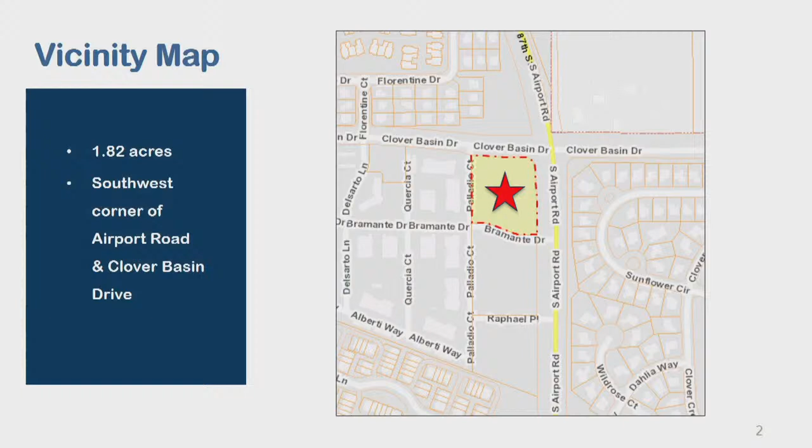So with that, this 1.8 acre site is located at the southwest corner of Airport Road and Clover Basin Drive in the Renaissance area.

The subject property is one of three adjacent properties, parcels fronting Airport Road, that are zoned MUN. The Vera West apartments are located immediately to the west on a parcel zoned residential multifamily. To the north of Clover Basin is a mix of attached and detached single-family units zoned RMN. On the east side of Airport Road is a single-family subdivision zoned residential single-family. To the northeast of this property is largely an unincorporated Boulder County enclave. There is a little sliver here of public facilities - it is a utility facility owned by Northern Water.

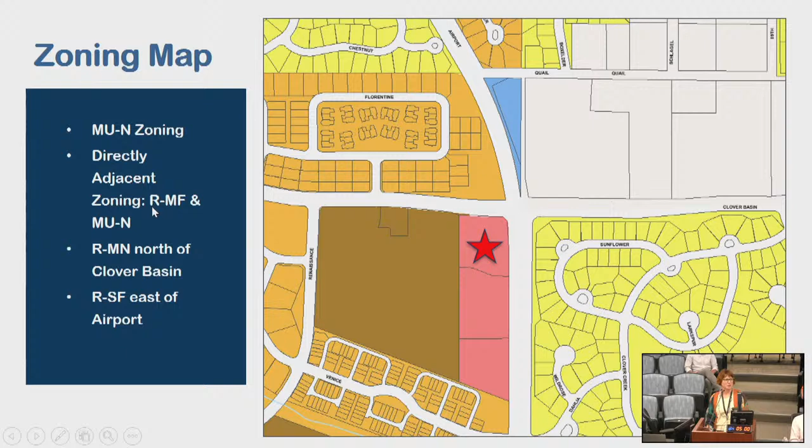I'll also note that Clover Basin Drive in this area is a median separated roadway, so basically you've got one way - you can go right in, right out onto Clover Basin Drive.

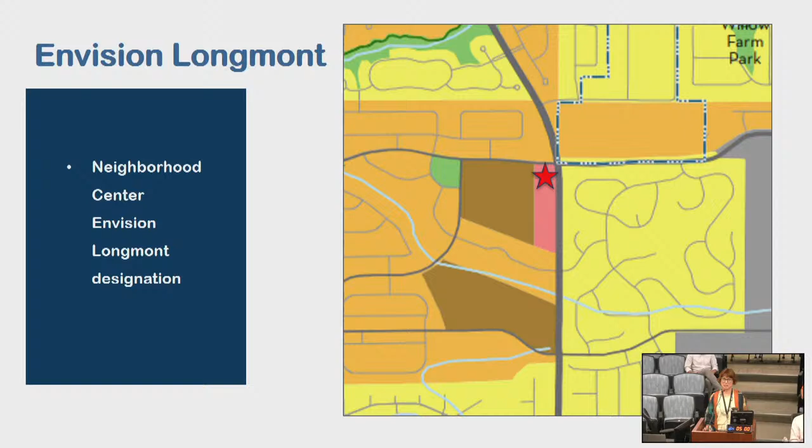So on Envision Longmont, this property is designated as neighborhood center. Neighborhood centers are intended to offer a mix of supporting services and small-scale commercial retail uses for surrounding residential neighborhoods. As detailed in the staff report, the proposed use is consistent with the provisions of Envision Longmont.

So in terms of general project information, the applicant will give a more detailed description of what they are proposing, but I'm going to give an overview. They are proposing a Ziggy's Coffee Cafe with drive-through service. It is a proposed 1,800 square foot single-story building that would include interior seating as well as outdoor patio seating in addition to the drive-through.

Restaurants with drive-through service do require approval as a conditional secondary use in the MUN district.

Access to the property would be from Palladio Court and Bramante Drive, both of which are private drives within the Renaissance community. There are shared access points onto both Clover Basin and Airport Road, which are limited to right-in, right-out movements. So this property does have some pretty interesting constraints, notably on the eastern portion of the property.

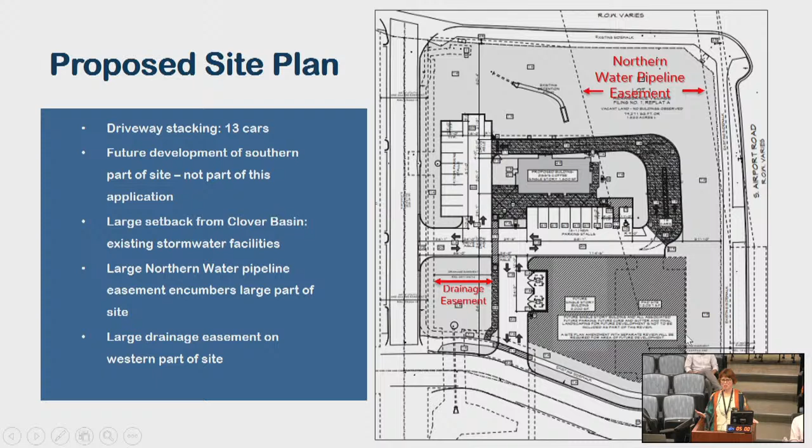Approximately the eastern third-ish contains an 80-foot wide pipeline easement held by Northern Water, as well as a significant drainage easement on the western portion of the property. A large setback from Clover Basin Drive is needed to accommodate existing stormwater facilities for this area. I will note that the southern portion of the site is contemplated for future development, but is not part of this application. If these southern parcels that are indicated for possible future development do come in for proposed development, if this site plan were approved, they would need to come in and do a site plan amendment to accommodate those properties.

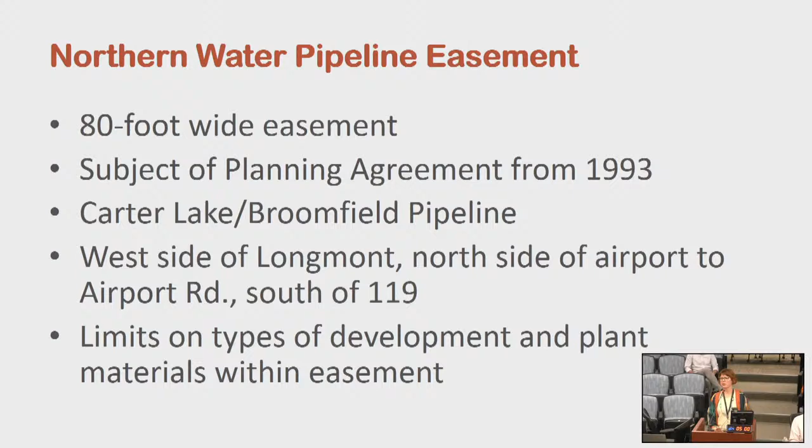As noted previously, there is that 80-foot wide easement held by Northern Water on this property. The planning agreement between Northern Water and the City of Longmont includes limits on the types of development and plant materials within this easement. The applicant and staff have coordinated with Northern Water representatives throughout this process to ensure that their requirements are being met in terms of plant material and what is allowed within that easement.

In terms of secondary uses, this site is part of an MUN district consisting of 3 parcels. There are 2 undeveloped parcels in this district, and the center parcel has been developed and contains a neighborhood scale commercial building that is occupied by primary uses in the MUN district, notably a tap room, ale house, a veterinary clinic, and a liquor store. Development of this property with a proposed conditional secondary use would still leave ample space for primary uses within this MUN strip.

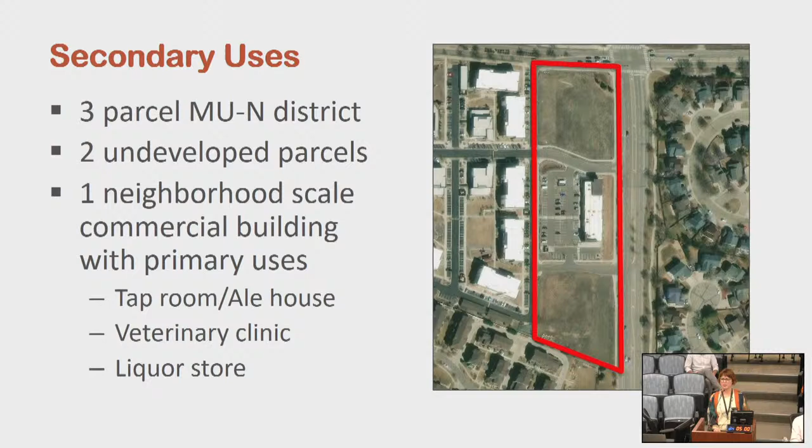So in terms of the development review process, it's been in process, including pre-application requirements, since 2022. There was just a bit of time lag between some of the submittals, so that accounts for the length of time of this project.

So at this point, I'd like to discuss the review criteria for all types of development, as well as conditional and secondary uses. Staff does find that the proposed Ziggy's Coffee with drive-through service does meet the required review criteria, meeting the standards established for conditional and secondary uses in the Longmont Land Development Code and residential compatibility requirements and standards for drive-through service.

Potential adverse impacts have been mitigated to the maximum practical extent. This site does include more than adequate stacking for the drive-through lanes, which are also sited and buffered in a manner that will minimize their visual impact, and also provides adequate customer and employee parking. EV and EV-ready spaces are provided as required in the Longmont Development Code and Colorado statutes.

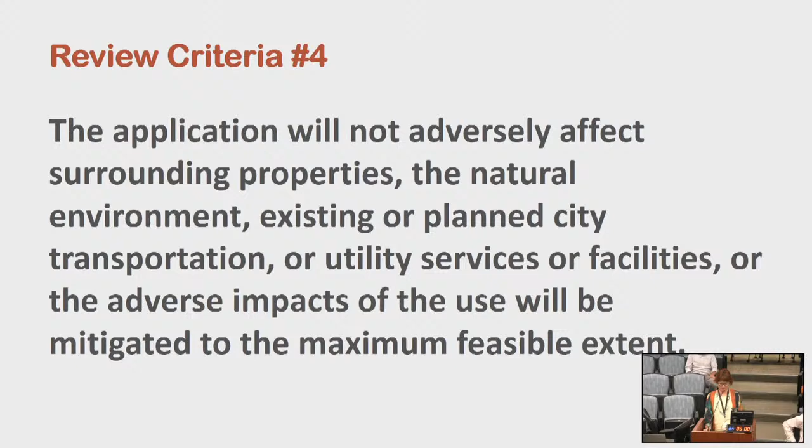Lost my spot here. So basically, all the transportation and utility infrastructure are in place to serve this project, as it is part of, it would be infill in a largely built-out area.

So the subject property is not within a riparian area, so this particular criterion, review criterion number 5, does not apply here.

The proposed site plan does include a pedestrian path to an existing sidewalk on Bramante Drive that does provide a connection to Airport Road and would also provide additional connectivity throughout the Renaissance neighborhood. Additionally, bicycle racks, ADA accessible spaces, EV facilities are provided in accordance with our code.

So in terms of conditional uses, these are uses on which specific conditions may be imposed to ensure compatibility and mitigate any potential adverse impacts. In the present case, the site has been designed in a manner that minimizes impacts and ensures compatibility with existing nearby residential areas.

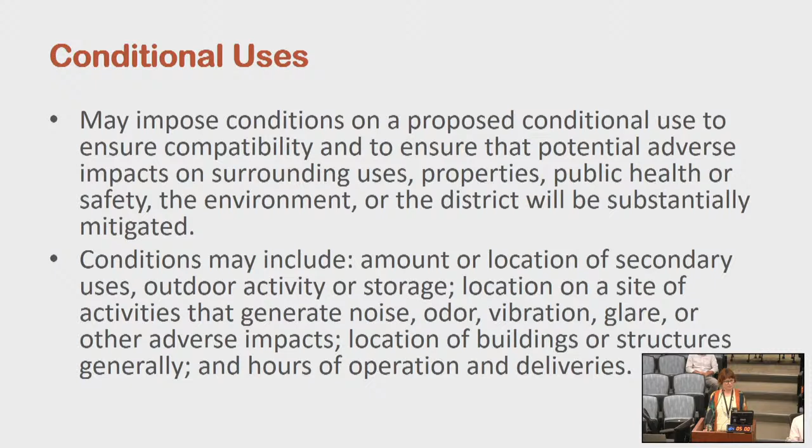So in terms of secondary uses, they must meet 3 additional criteria. The subject property is intended for development with neighborhood scale commercial uses. No direct access, again, will be provided to either roadway. There is adequate capacity on roadways to accommodate additional traffic, though as noted in the traffic study and mentioned in the staff report, this type of use typically captures existing traffic rather than generating new trips.

So it doesn't necessarily become its own destination. It's the type of use where people stop in on their way somewhere else while they're already on the road, if they're driving.

So the proposed drive-through, as mentioned, does exceed code requirements. And additionally, this proposed building will include indoor and outdoor patio seating. The site includes pedestrian connectivity, bicycle parking. The nearest adjacent residential use is a 3-story multifamily development immediately to the west.

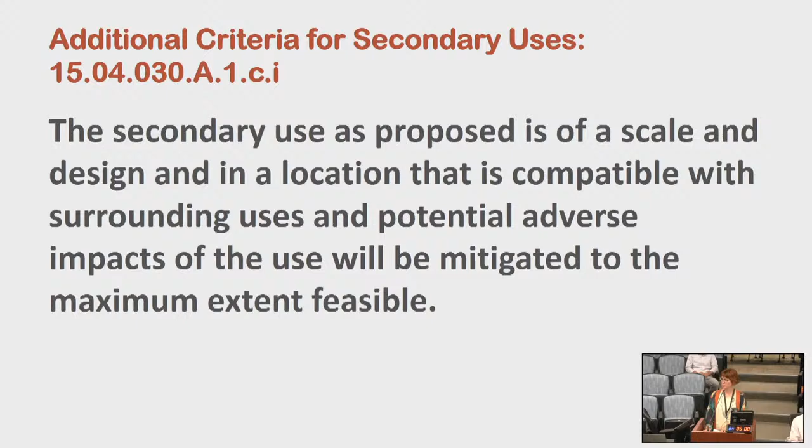So with all of these elements, we do find that the proposed secondary use is compatible with surrounding uses and potential adverse impacts would be mitigated.

As described previously, the proposed Ziggi's Coffee is consistent with the goals and policies of Envision Longmont and is consistent with the neighborhood center land use category. The proposed use is also consistent with the purpose and intent of the MUN zoning district as well as development standards contained within the LDC.

Additionally, it does, as mentioned previously, exceed requirements for proposed drive-through service as far as stacking, which will minimize those impacts as well.

Finally, the MUN district in which this subject property is located contains a bit more than 5.5 acres. The parcel immediately south is developed with a neighborhood shopping center, but it only contains primary uses. The southernmost property in this district is undeveloped.

So development of the subject 1.8-ish acre property with a secondary use would result in less than one-third of this district being occupied by secondary uses, and would not cause the district to exceed the 50% threshold we have interpreted historically as the ceiling for secondary uses in a zoning district. It would not diminish the available supply of land available for primary uses either.

One other thing to note is that the proposed Ziggi's Coffee would not occupy the entire site, and it is likely that the southern portion of the site will be developed for additional uses at some point in the future. Those could very well be primary uses, so it's very likely that this property does not entirely contain secondary uses either.

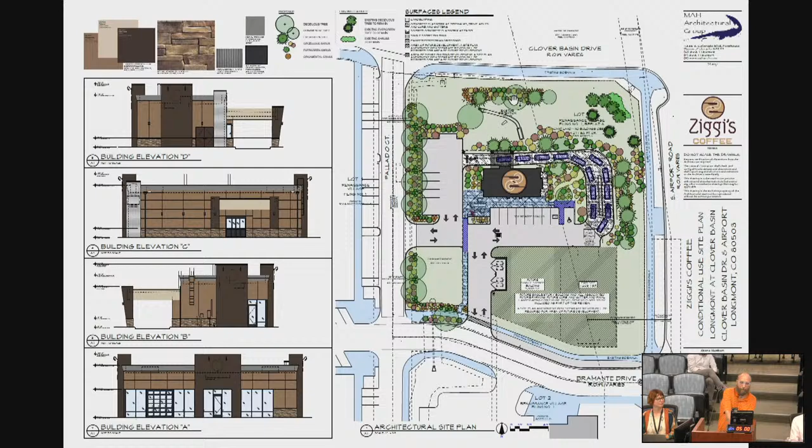Thank you. This is a public hearing item. As such, we will go ahead and open this up for public invited to be heard to comment on this. We do have one person who has signed up: Javon Beck.

I apologize, I'm not able to really speak to that one. Okay, I appreciate your honesty. Thank you.

You can sit down for a second. I just need to collect my thought first. Are there any other comments? Because I had another thought, but I just wanted to collect it for a second. Is there no one else? Anna, did you have something?

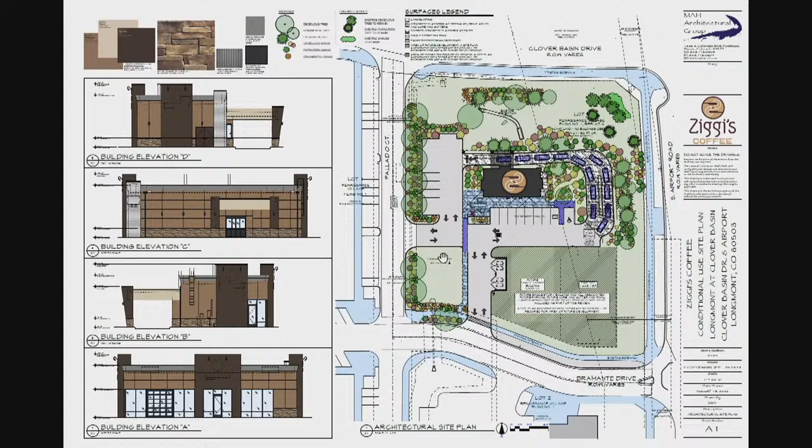While you're up, that answers one of my questions. How did the applicant team, how did Ziggi's assess what the optimal level of bicycle parking was for this establishment, given that you're trying to make it a community-centric opportunity with a bunch of residential of different scales and styles within bike distance, and both Clover Basin and Airport Road have marked bicycle lanes, both west to east and north to south?

For the bicycle parking, we will typically try to ensure that we exceed the minimum standards, but also minimize the amount that it takes away from the patio, because we always try to locate the bicycle parking at or near, as close as possible to the patio, and that's how we came up with it.

Got it. So in this case, you're aiming for about 10% of the capacity of bike parking, or maximum capacity? 4 to 40 something. Okay, thank you. A couple questions for staff.

Jennifer, could you clarify for us what EV ready means in this context? Sure, basically it means it may not have the plug ready to go, where you can charge immediately, but the infrastructure will be in place so you can add actual charging stations - the electrical, the wiring, the conduit would be there, but there wouldn't be a charging station there. Correct, but that could be added at some point, at the applicant or site owner's discretion.